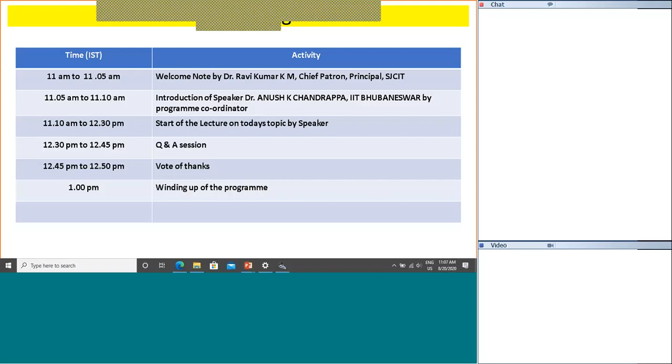Just check whether sir, mic is on or not. Yeah, your is fine. Dr. K.M. Ravi Kumar sir, can you speak, sir? Can you hear me? Your voice is not audible for us. One second, Som, I'm helping him, wait for a few minutes. Okay, no problem. Som, can you hear me? Yes sir, I can hear you. Som, he logged in with another number, you can check with DK. Oh okay DK, so you kindly provide the option for him. One second, DK, you are saying? Dr. K.M. Ravi Kumar, Dr. Ravi Kumar K.M. is another name, is it fine? Yeah, one more, I will leave this. Yes, so okay, yeah, so the issue is clear, you can speak. Okay.

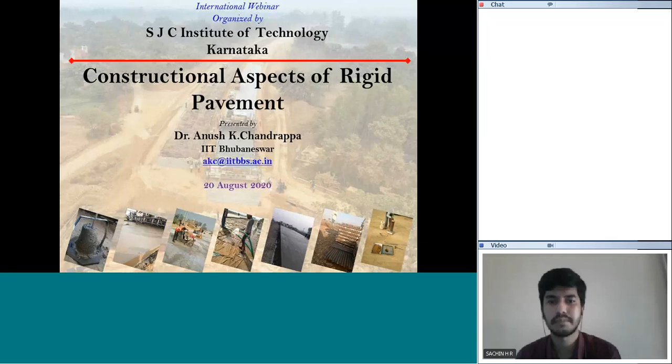Let's take a small introduction to pavements. We have two kinds basically: conventional and non-conventional. Conventional pavements include flexible pavements, which can be bituminous or unsurfaced granular pavements, and rigid pavements, which are mostly concrete pavements. Non-conventional pavements include semi-rigid pavements, porous pavements, and paver block pavements, and there can be different kinds within this category as well.

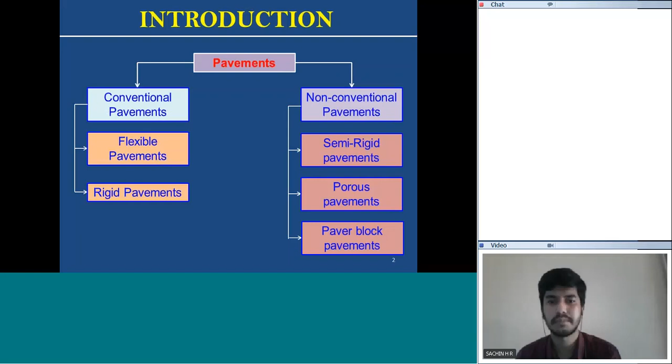In this presentation, we will limit our talk to rigid pavements. In rigid pavements, the load transfer happens through slab action, unlike flexible pavements where you should have a very good interlock between aggregates. Whatever load comes on the rigid pavement slab is transferred by slab action, meaning it should have a very high flexural strength. That's why we call it rigid.

It also possesses a high degree of stiffness. If you compare the stiffness of a bituminous layer to a PQC layer, that is pavement quality concrete layer, there's around 10 times difference approximately. Basically, rigid pavement means a concrete pavement, as I told you earlier.

This is a typical cross section of rigid pavements. We have pavement quality concrete, which is the concrete slab material, and dry lean concrete, the DLC, which forms a uniform foundation for the PQC layer. Then we have sub-base for drainage purposes, and subgrade as the founding material. Keep in mind that PQC and structural concrete used in other structures like beams and columns are quite different in terms of composition and workability. We will see this in further slides.

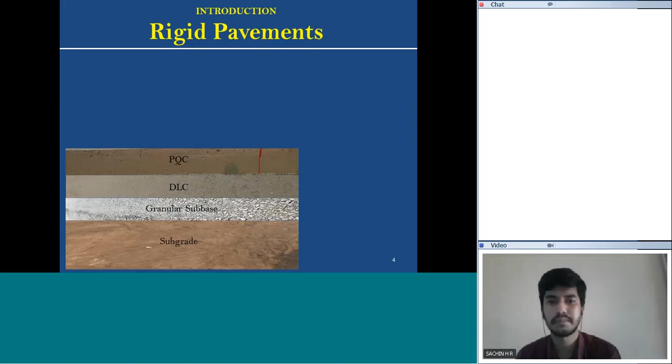So again, a typical rigid pavement cross section: PQC, DLC, granular sub-base, and subgrade. When a load comes on this pavement, the subgrade is subjected to very low load because the PQC slab takes the maximum amount of load. The lower layer just provides uniform support. In concrete or rigid pavements, the support should be uniform - even if weak, that's not an issue, but it should be uniform, meaning it should have the same modulus of subgrade reaction or CBR value throughout the stretch.

Now similarly, if the same load comes on a flexible pavement, let's see what happens. This is a bituminous pavement. We can see that at the subgrade, the load is spread over a very small area and the magnitude is very high. So the PQC results in a very low load at the subgrade layer, but a bituminous pavement may give higher load to the subgrade layer.

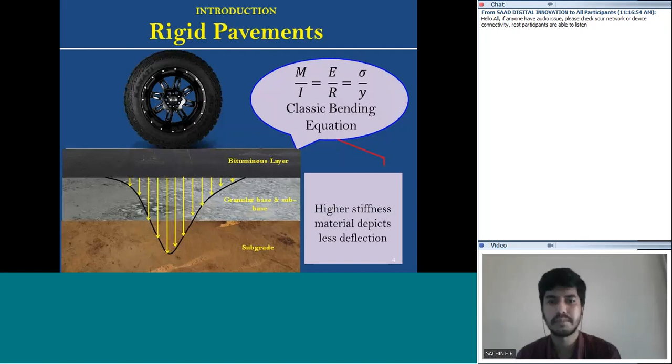In rigid pavements, we normally have three variants. One is JPCP, jointed plain cement concrete pavement, which is most widely used in India and designed as per IRC 58. Then we have JRCP, jointed reinforced concrete pavement. And then CRCP, continuously reinforced concrete pavement, designed as per IRC 118.

Mostly in India, we always go with JPCP because JRCP and CRCP may be costlier and also difficult to maintain if something goes wrong during construction or design. The difference between these three pavements is mainly joint and crack spacing, and the amount of reinforcement. JPCP is plain concrete with no reinforcement, but in JRCP and CRCP, we give some reinforcement mainly to hold the cracks tight without letting them open wide.

If you see this picture, this is JPCP. The joint spacing in JPCP, that is the transverse joint spacing, is around 4.5 to 5 meters. If it goes beyond 5 meters, it becomes quite difficult to control these cracks, as you can see in the profile, a crack along the depth.

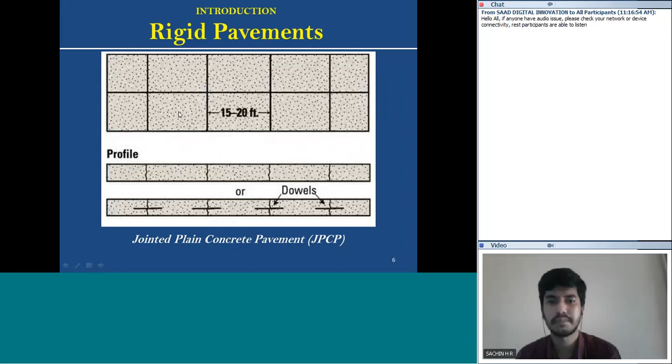So these cracks, if you go without reinforcement, for a longer or wider spacing between these transverse joints, a crack can come in between. So to contain this crack, hold it tight, and increase the joint spacing, we go for JRCP.

But keep in mind that whether it is JPCP, JRCP, or CRCP, for a given traffic, the thickness of the concrete slab may not change, because the reinforcement we give in JRCP and CRCP won't help structurally. It is just given to hold the cracks tight.

So if these cracks open wider, it will affect the riding quality, and water can easily ingress, damaging the reinforcement. So the mesh or reinforcement given in JRCP or CRCP is just to hold these cracks tight without opening wider.

Since CRCP does not have any joint other than construction joints, the riding quality in CRCP may be better compared to JRCP and JPCP.

But in JPCP, every 4.5 meters you will encounter one joint, and if the joint is not properly prepared, you may encounter a small bump or something like that.

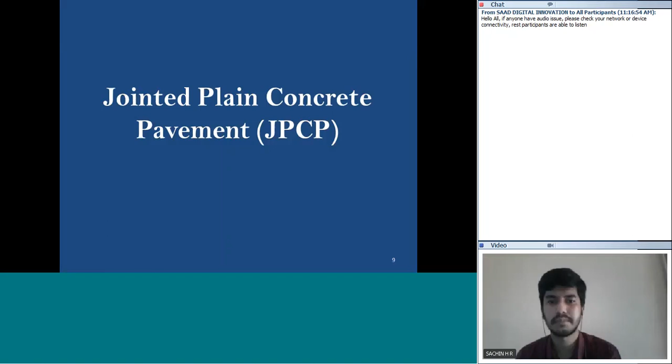But today's lecture we will confine to JPCP, because that is what we use widely in India, and most NH and SH are built using this JPCP technology. So in this lecture we will cover topics about JPCP, its stresses, technique of construction, how we lay JPCP, and design considerations.

Before I start, there is a very good saying, I don't know who said this, but it says: a wrongly designed concrete pavement, even though it will be a pavement, if rightly constructed will perform better than a rightly designed concrete pavement but wrongly constructed. That means if you have designed wrongly, maybe left out some traffic considerations, but if you have rightly built it with good quality control and practices, it can perform excellently. But if you have designed very well considering all parameters, but constructed wrong, with issues in quality, then the pavement may not serve its full design life.

Before we go further, the first concrete pavement was built in Inverness, Scotland, and then in India it was built in Madras. This information I got from the internet or Google.

Going for stresses, now we'll talk about concrete pavement. The concrete pavement will be subjected to two kinds of stresses or loads: one is load factors from commercial vehicles or traffic, and one is climate factors or environmental factors. These two factors will affect the concrete pavement at various stages of design life.

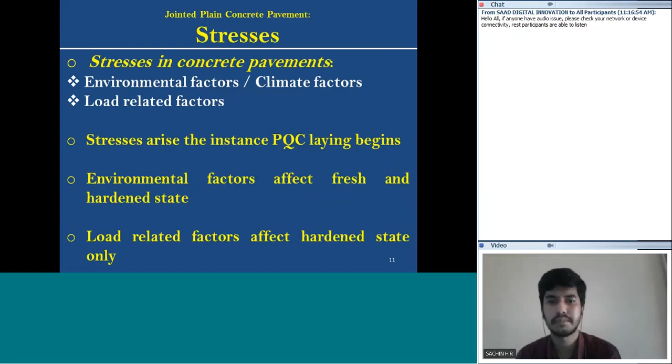So we'll see how they play a major role. Let's say when you start laying a concrete slab - this is basically a concrete slab - when you start laying, it's in a fresh state, fresh concrete laid.

So now what happens? This concrete will be subjected to sun rays and wind. These two factors start evaporating the water. In the top surface, the water will be evaporated, and due to this, there is a moisture gradient.

In the top, there is less amount of water. In the bottom, there is more amount of water. There is some gradient developing in the slab. Second thing, within the concrete there is a reaction happening which is exothermic. Exo means out, thermic means heat. So there is a heat release being released due to hydration of cement, which will increase the temperature of the whole concrete slab. Due to these interactions, there is a gradient, there is shrinkage, there is a reduction in the volume. It's trying to reduce its volume due to loss in water.

But parallelly, it is gaining also some strength, right? It will apply some restraint. So blue is restraint, it will apply some restraint. Due to interaction between these forces, it may lead to plastic shrinkage cracks, which are the first kind of cracks when we lay the concrete slab.

When you lay a fresh concrete slab, if you don't protect them from sun rays or wind, you will see very thin and widely spread plastic shrinkage cracks. Right now these are how they will look in the initial stage. So this is a hardened concrete slab. This kind of cracks are basically shrinkage cracks which have happened in the fresh stage itself. If it is not corrected in time, this is how the slabs will basically look.

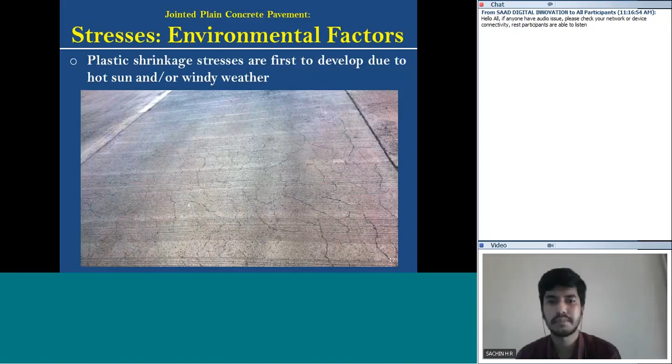Again, you can see they're very thin cracks. This is typical how the whole slab, if you don't protect from sun and wind, will look. Normally the plastic shrinkage cracks, if you want to identify in the field, you can identify just by looking at the pattern. Normally they are parallel to each other, and they're always perpendicular to wind direction.

So why perpendicular? What happens when the wind is going in this direction? Perpendicular to the road, shrinkage happens along this width. That's why the cracks will be parallel to each other and perpendicular to the wind direction. This is one way to identify what kind of cracks these can be, if it occurs in the fresh state itself.

Other thing, very important thing: after plastic shrinkage, a much more rigorous kind of stress is drying shrinkage crack. This drying shrinkage leads to excess contraction stresses. So what happens as the concrete starts getting harder and harder, it's gaining strength.

At the same time, as we lay a concrete slab, normally using slip form pavers, we lay at a rate of let's say around 300-350 meters per day. That will be the day's work, around 300 meters per day length covered. During that phase, the whole length-wise and also width-wise, it will try to contract because there is a loss of moisture, and hydration is happening, and heat wants to come out of the pavement.

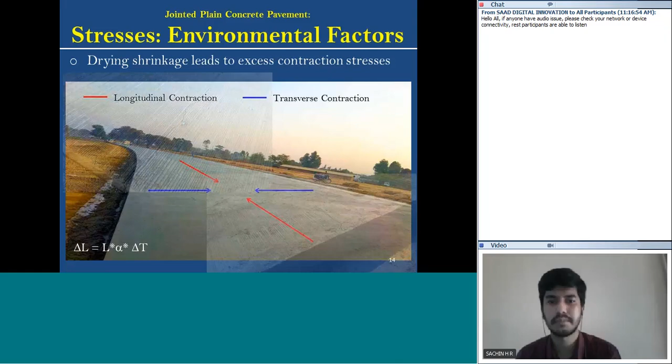More shrinkage can happen. To avoid that kind of shrinkage, we adopt some practices of construction which we will discuss. But this is how these contraction stresses will act in the fresh concrete when we lay a fresh concrete slab.

So due to these kind of contraction stresses, these kind of cracks will occur. This is basically a transverse crack which is due to longitudinal contraction. If you don't consider longitudinal contraction at a particular given time while laying concrete, these kind of full width and full depth cracks can occur in the concrete slab.

And these cracks, once they occur, are very difficult to maintain. First thing, because they are random - the shape is not straight, it is a random shape - and at this particular crack there may not be any load transfer devices other than interlock of aggregates. So we don't have any dowel bars or those kind of load transfer devices.

So over time, what happens? These joints will easily start spalling. When vehicles can start rolling on these kind of pavements, this will start spalling slowly and will become a wider gap, which will allow water and also other debris to enter, affecting the riding quality.

As I told you in this relation, delta T, the temperature differential, plays a very important role in PQC behavior, even in the hardened state and also in the fresh state. In the fresh state, it will cause contraction stresses. In the hardened state, it will cause curling stresses.

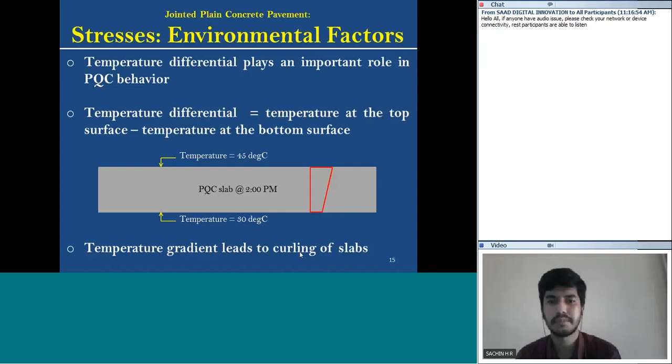At night time, the temperature at the bottom is high and the top is low. So it will curl upwards, like a bowl. You can see this phenomenon even when you keep some papad on a hot tawa, it will immediately take the shape of a bowl, because the top is cool and the bottom is in contact with the hot surface, so it starts curling.

Similarly in the daytime, it will curl in the other direction, curled downwards, so the center part will lift up while the edges remain in contact with the DLC. Here the top is at high temperature and the bottom is at low temperature.

This is the gradient stress trying to lift up the slab, and here is the self-weight restraint. One is trying to lift up the slab, and the self-weight restraint is trying to bring it back to the original position. Due to this, some issue arises. Similarly in the daytime, this gradient is trying to lift it from the center, but the self-weight holds it in the original position.

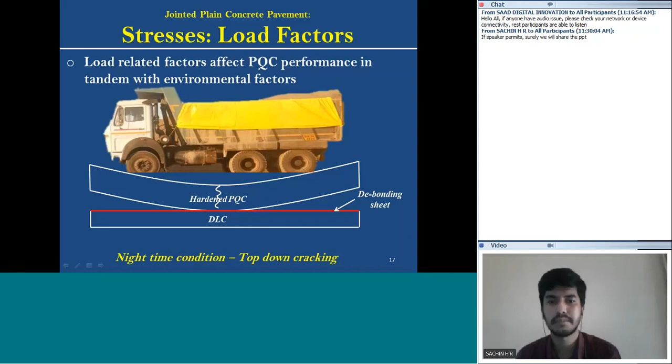On the other side, in the daytime, the curl is lifted downwards, and the center is upwards. Again, as the vehicle comes, the tension is maximum at this particular point, and it starts cracking from the bottom. So we call this bottom-up cracking. Again, this won't happen in one go, but due to repeated application of loads, which we call fatigue.

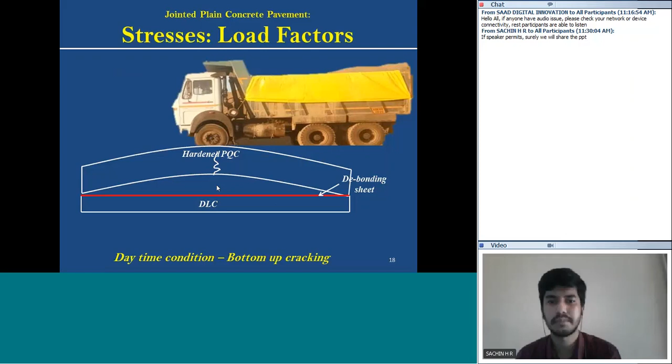So in the design of concrete pavement, we take into account the fatigue effect or fatigue phenomena. In fatigue, we apply repeated loads, and the load applied will not be equal to the ultimate strength of the material. It will be some percentage, let's say 30%, 50%, or 60% of the ultimate load, applied at some regular cycles, which can be 10,000 cycles or 1 lakh cycles, applied continuously.

As you apply more and more cycles, there will be crack initiation, because the material is losing its stiffness, and then the crack will start propagating. At some point, the material will completely break, which indicates the fatigue life of that particular material.

The same thing happens to the concrete pavement. Due to repeated application of loads, the crack will initiate and propagate, and finally at the end of design life, it will reach the top or bottom, depending on the type of crack it is undergoing.

So, as I told you, various stresses occur in PQC, which can be climate factors or load factors. These stresses are high enough to develop cracks in the slab even without loading. Let's say you don't apply any load in the concrete pavement at all. Even then, a crack will occur because of climate factors itself.

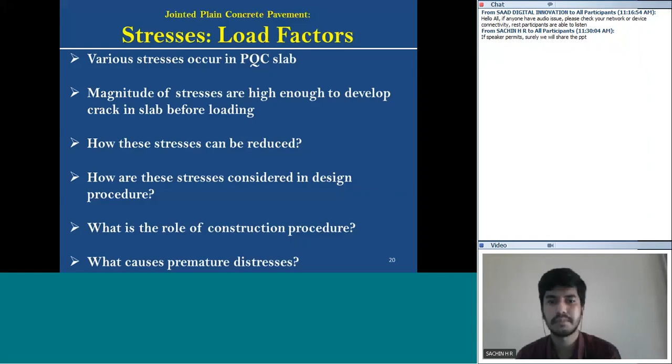So how to reduce these stresses? How can we control this kind of stress, and how are the stresses considered in the design procedure? While designing, how do we account for them? And what role does the construction procedure play? When we construct the concrete pavement, does it play any role in controlling these stresses? Then, what causes premature distress? Sometimes, if we adopt a wrong construction practice, there can be development of premature distresses. We'll look at all these things in a step-by-step manner.

First, let's have a look at H.R.S. Westergaard. He's one of the fathers of pavement mechanics. Whatever design we do for rigid pavements like concrete slabs, all the equations we use were basically developed by H.R.S. Westergaard.

Going for JPCP construction, the construction of concrete pavement involves various steps. First, we lay and compact the subgrade, normally estimated at 500 mm thickness, compacted layer by layer, like 200, 150 and 150, to achieve proper density, not in a single 500 mm layer. Then we lay and compact the granular sub-base layer, which acts as a drainage layer. Then we lay and compact the DLC layer and the PQC layer, followed by finishing, texturing, tining and joint construction. All these steps finally give the product of JPCP.

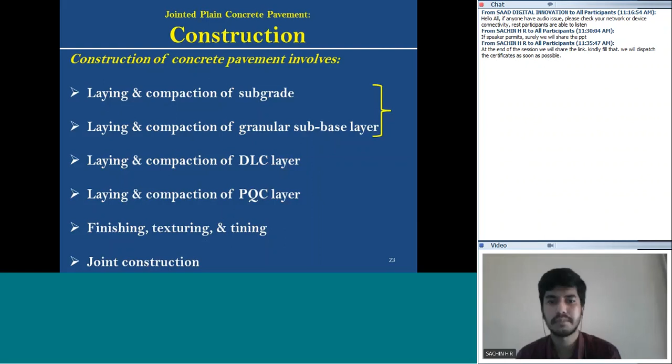When we talk about subgrade and GSB, these are common for flexible or rigid pavements, and there won't be much change in the base layer. So we start with the DLC layer. DLC is basically a harsh concrete, a material with around 150 to 160 kg per m³ of cement, with a particular gradation, laid in the same manner as flexible pavement. So whatever equipment or practices you adopt for flexible pavement can be adopted for DLC also.

In DLC, the most important thing is mix design. DLC should be designed; you cannot just mix cement and aggregate and compact it. It should be designed for particular requirements, and for that we follow IRC SP 49. The thickness of DLC is normally fixed as per IRC standards: for SH and NH, we assume 150 mm, and for other roads, 100 mm, which is used for normal construction.

Now, the main function of DLC is to provide uniform support for the concrete slab. As I told you, even if the base is weak, that's not the issue, but it should be uniform. So if there is non-uniformity in the GSB or subgrade layer, this is taken care of by the DLC, which provides uniform support for the PQC slab to rest on.

Second, the width of the DLC layer is always more than the PQC layer. This serves two purposes. One is in mechanized construction: when you go for slip form paving, this extra 0.75 meter acts as a platform for the slip form paver track to move, since the track requires a very hard and plain surface. We use this extended DLC width as that platform. Second, studies have shown that the extended DLC base can also have some impact on reducing PQC stress.

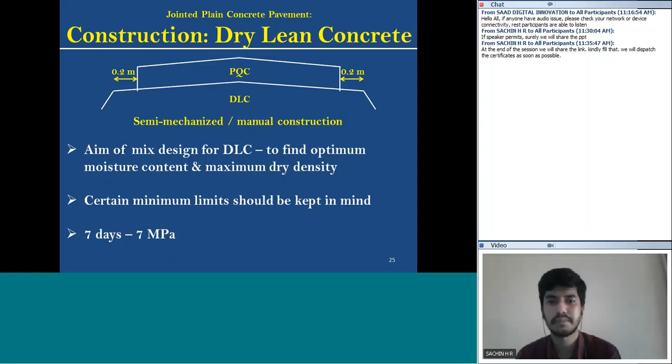Now we'll see how this design is made basically. Specification of cement content, aggregate gradation, and aggregate to cement ratio - these three should be first finalized. What cement content do you want to adopt? Minimum cement content as per IRC is 140 kg per cubic meter, and as per MORTH it is 150 kg per cubic meter.

But yes, you can go still higher if the strength requirements demand. Aggregate gradation is a particular gradation given in a particular code, and it can also depend on the contract agreement. Then we have aggregate cement ratio - what is the ratio of cement to aggregate?

Once you do this, you prepare mixes at various water content, then develop a density moisture relation, and identify the optimum moisture content and maximum dry density. Whatever density and OMC is finalized, at that particular density you will again compact a cube and find the compressive strength. If you achieve 7 MPa at 7 days, then the design is finalized. If not, you may have to change the cement content or reduce the aggregate to cement ratio and rework the whole design procedure.

Now, selection of material composition. Normally we use OPC, which as per IRC is 140 kg per cubic meter, and as per MORTH it is 150 kg per cubic meter. The aggregate cement ratio given by IRC is 14:1, and the MORTH gives 15:1. You can also go with fly ash and other SCMs added in DLC. But whenever you add fly ash or other SCMs, the aggregate to cement ratio must be reduced to 12:1, as recommended by IRC, because the strength gain in those materials may be low.

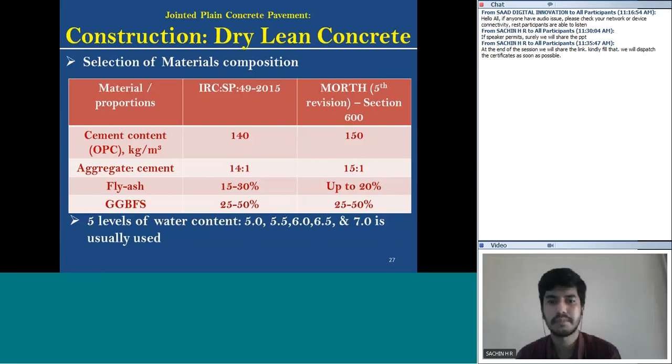When developing a density moisture relation, we go with starting 5 to 7% of moisture content - we start with 5 and end with 7. In this particular range, we will be able to obtain the OMC and MDD. We will prepare a cube at different moisture contents, as I told you.

In compaction, we use a vibratory hammer, not a Proctor hammer. We use a vibratory hammer which applies a force of 300 to 400 Newton using a particular plate area for 1 minute per layer. We compact it normally in 3 layers, vibrating each layer for 60 seconds, and finally measure.

So basically we measure density corresponding to water content, then identify OMC and maximum dry density, whatever water content we achieve. This is how we will finally get one density moisture relation. Once we find this MDD, at OMC and MDD, you will again cast cubes at whatever cement content you have used and find the strength at 7 days, which should be at least 7 MPa.

As told, we require 7 days 7 MPa as per IRC SP 49, and as per MORTH it is 10 MPa. The reason MORTH has a higher 10 MPa is basically that the aggregate cement ratio is quite high in MORTH. So there is some change in the strength requirements. If you want higher strength, you can go with higher cement content. But keep in mind, giving higher cement content may also cause issues with cracks in the fresh state.

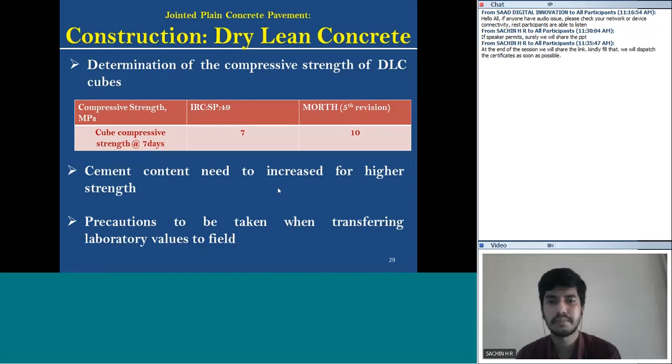You will basically require a closed environment, so there won't be any exposure to the environment - no hot sun, no wind and all. But in the field, you're transporting the mix from the plant to the site, and there will be some losses due to evaporation, where the moisture content you added may change.

So at that point, you may have to cover the DLC to prevent the loss in moisture. You can add an additional 1 to 2% extra moisture for compensating these kinds of losses.

So that you ensure that when it goes to the site or the particular dumping site, the OMC will be achieved there. The construction we do is same as flexible pavement practices - we use the same kind of paver used in flexible pavement, which has a system of auger, a vibrating screed and a hopper. Everything we use, this same equipment, for this DLC material.

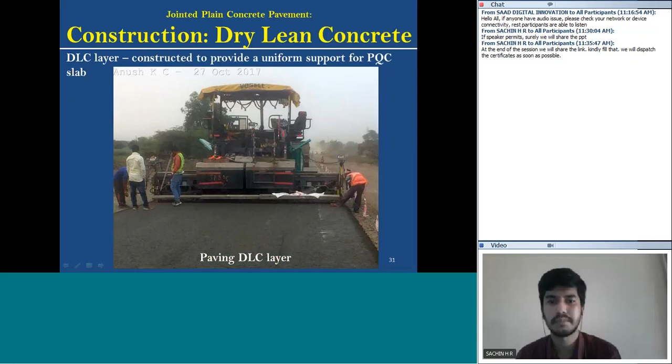Once we lay it, we use a particular screed which gives initial compaction, just to make it a flat surface, and then we start with rolling behind. The rolling passes, the number of passes, will be decided based on the trial stretch we conduct before laying the DLC in the field.

Second thing, the joint construction - so basically we are conducting a joint. Unlike hot mix asphalt, where you can push the material and there will be overlap, here mostly there won't be any overlap because it's a hardened material. So you will basically cut a vertical joint, apply some cement slurry, and then place a new or fresh DLC layer.

Once you finish the paving operation, compacting operation, and rolling operation, you will immediately apply curing compound. The curing compound is essential to avoid loss of moisture. What happens is, if you don't apply it and there's hot sun and a lot of wind blowing during construction, the top surface may become too dry and friable - that means it can become like powdery. So to avoid those situations, it's better to apply curing compound immediately once you lay the DLC.

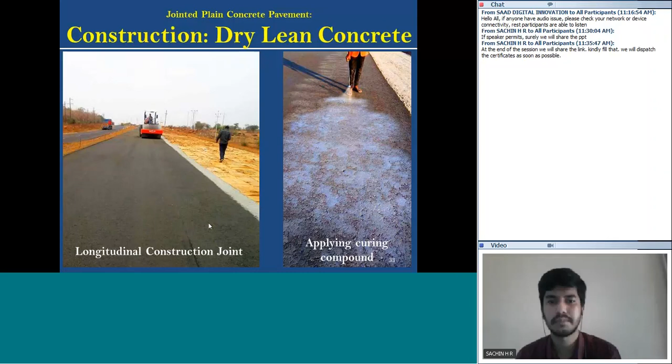This curing compound can be wax based or resin based. It should hold the water for around 4 to 5 hours, and then again you will have to use jute bag curing to avoid these losses. This is curing done using emulsion - so even emulsion can also be used as a curing material in the DLC layer.

Once you stop the previous construction, you will start the next stage by making a joint construction so that you may bond the next layer and the new layer. You can add some cement slurry at the joint so that proper bonding can be expected.

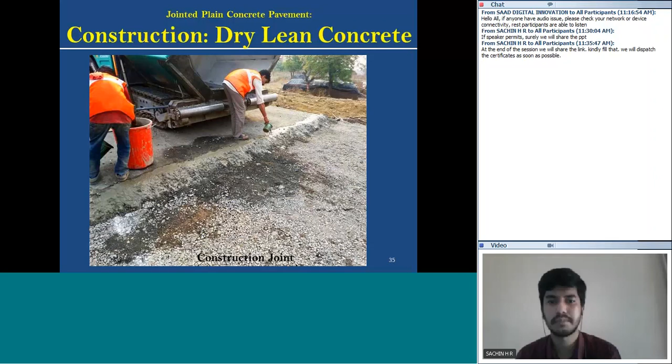Finally, once you lay it, you determine the OMC and density achieved in the site. For this, what is the reference density now - is it the laboratory values or the trial stretch values? Normally, we don't take laboratory values for DLC because in the laboratory, since we're doing it in a very closed environment, the density may be quite high.

In that case, the same lab density we achieve will be transferred to the field to come up with a trial stretch. Before going for large scale construction, you will do around a 60-meter trial stretch somewhere near the site, and then you will achieve a particular density - like it can be 98% or 99% of lab density. That will be the reference density for your further field-scale large scale construction.

That will be your maximum density, or density of 100%. So in the field, you need to achieve relative density for the field trial stretch, not the lab density. So, as I told you, the DLC, while laying, can undergo excessive drying, and also depends on the distance from the camp site to the site of construction.

If it is too far, what happens? There will be loss of moisture in the DLC material. Even if you cover it with a tarpaulin, we may expect some loss of moisture here and there. So to avoid that, there are some guidelines given.

If it's 90 minutes, it takes 90 minutes for finishing the whole process, then the air temperature should be 25 to 30 degrees. You have to finish in this time. You can have 120 minutes for the finishing process when the air temperature is less than 25 degrees.

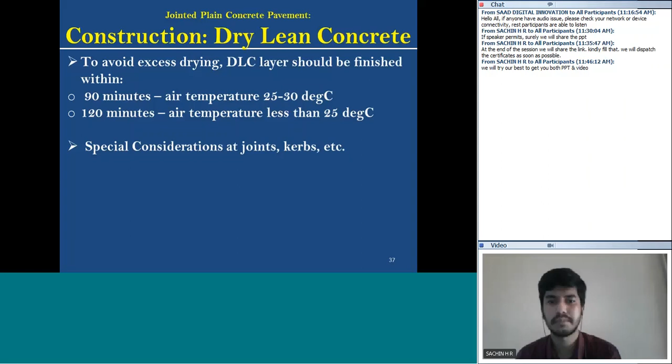This way you can adopt some quality control to avoid any loss in DLC quality. There will be special considerations at joints and kerbs. Near the kerb, a roller may not be able to move very close, so you may use a plate vibrator or a baby roller. Small rollers can be used to compact those edges where the DLC cannot exactly reach near the kerb. So you can easily use a plate compactor or a baby roller, and similarly at the joints also.

So that was about DLC. Now we'll slowly go towards the PQC. PQC is the only designed element in concrete pavement. If you see the concrete pavement, whether it can be any other, let's say, higher pavement, mostly we design only the slab thickness. We won't design DLC thickness - it is fixed as per the IRC, and the GSB thickness is also fixed as per the IRC. So we design mainly the PQC, and this is logical and rational because the maximum load-taking element is basically the rigid concrete pavement, and that has to be designed, unlike other layers where the load transfer to them is very low.

While laying PQC, the most important thing is harmony in the construction. All the steps should be properly interlinked to achieve a very good concrete slab at the end of the day. The steps involve preparation of mix at a plant as per the design of mix done in the laboratory. Then, parallelly, you prepare the subsurface - this means the PQC will be laid on the DLC, so the DLC may have some dry or friable particles which have to be removed. Then you transport the mix, you pave the PQC, do surface finishing, prepare the joints, cure it, fill the sealant at the joints, and then open it to traffic. This is the whole process of PQC construction which should be properly managed.

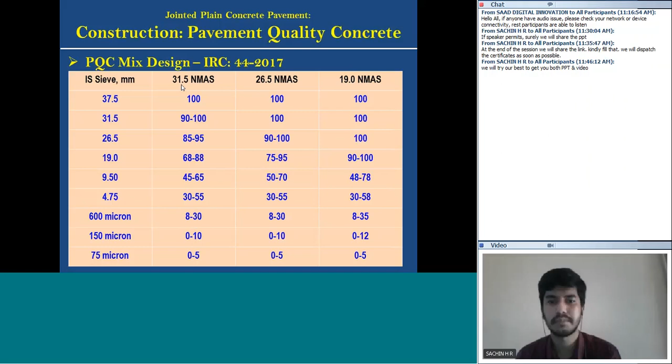So mostly 31.5 is preferred considering the performance and also the cement. If cement content is too high, it's bad; if too low, it's also bad. This particular gradation gives a very balanced cement content which can be easily maintained or controlled at the site under field conditions.

You can also use admixtures - fly ash, silica fume, metakaolin and GGBS. These materials can be added as a replacement for cement so we can achieve some sustainability, and they may also improve the durability of the concrete over the long term. By adding fly ash, you will not obtain a very high initial strength, but in terms of durability and workability, it can be better.

Going for the PQC mix design, I won't go into more detail. Normally we talk about concrete design, we target some flexural strength - to achieve a characteristic flexural strength of 4.5. That is what we use as the 28-day strength, the characteristic flexural strength.

But while designing, we target a higher strength assuming some standard deviation - it will be characteristic flexural strength plus 1.65 standard deviation. This value is what we normally use for M40 concrete. If you use this value, it will be around 5.16 MPa, what we need to achieve as target strength.

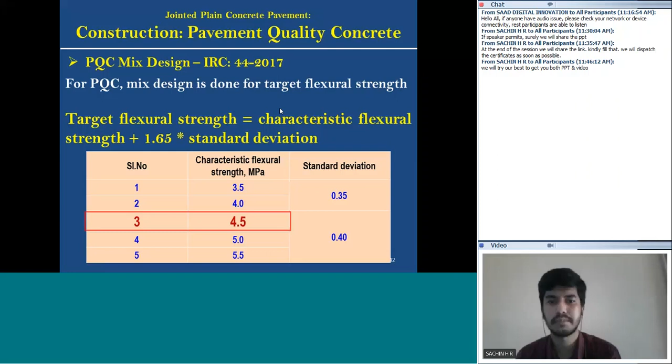Going for the components of the PQC mixing plant - the mixing plant is where we produce the PQC. The capacity of a single plant can be 120 m3 per hour, or even higher depending on the agreement of contract or the contractor's capacity. It can even be 240 m3 per hour.

Now the 120 m3 per hour plant will be giving around 80 to 90 m3 per hour, considering the efficiency of the single plant. It won't always produce 120 m3 - obviously there is some loss of efficiency. It will be 80 to 90 m3 per hour.

So then we have a cement silo which holds the cement, then a pug mill to mix the concrete, then a chilling plant. Then we have dumpers, then aggregate stockpiles. Dumper capacity, or what we call tippers, normally the capacity is around 8 to 9 m3 they can carry. So for 1 hour, around 9 to 10 dumpers may be required to finish one batch of a single plant.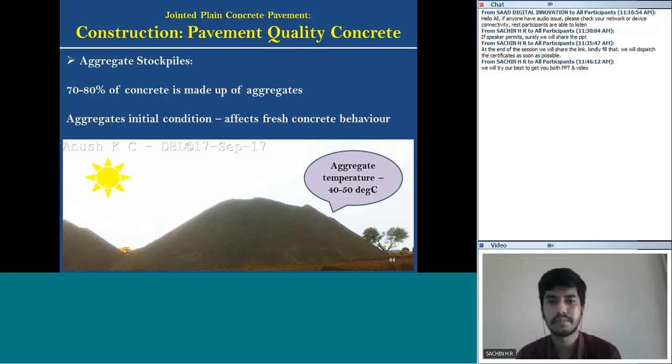Now when it is very hot, let's say midday or normal days, the aggregate temperature will be around 40 to 50 degrees. This high temperature can certainly affect the fresh behavior of concrete. What happens when you add this 40, let's say 50-degree aggregate temperature in the mixing plant - at the same time, normally the cement you get on site will be in the form of a bulker. You won't use cement bags, but use directly from the plant. You bring the big bulker.

The cement will be loaded in the bulker, and it also will be very hot, like 50 to 60 degrees temperature, because it directly came from the clinkers. So when this 50-degree cement and 50-degree aggregate are combined to produce concrete, the concrete will be at much higher temperature because it releases heat while hydrating. It can be around 60 degrees. At this high temperature, the concrete can easily undergo shrinkage cracks - the high temperature of materials means the concrete will be having high temperature.

High temperature of concrete leads to plastic shrinkage cracks and harshness, so it's very difficult to control this kind of concrete. High air temperature plus high wind velocity and low relative humidity are very favorable for shrinkage cracks—they're like close friends causing it. So the worst case is hot concrete, hot air temperature, high wind velocity, and low relative humidity. The concrete will easily fail and you cannot control it in the field. Even if you pave, it will immediately show a crack as the paver goes forward.

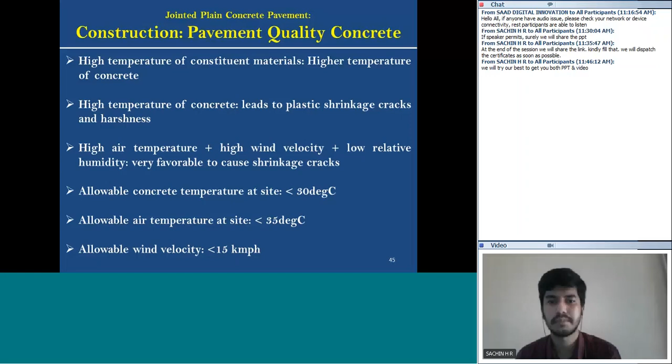So there are some guidelines from experience. Normally the concrete temperature should be less than 30 degrees when you bring it to the site and pave. Second, while paving, the temperature of air should be 35 degrees or less—less is always better—and the wind velocity must be less than 15 kmph. These three things should be correctly ensured at the site while paving the concrete pavement. If any one of these is exceeding, there is an issue with the quality of concrete, which will be difficult to manage once it hardens.

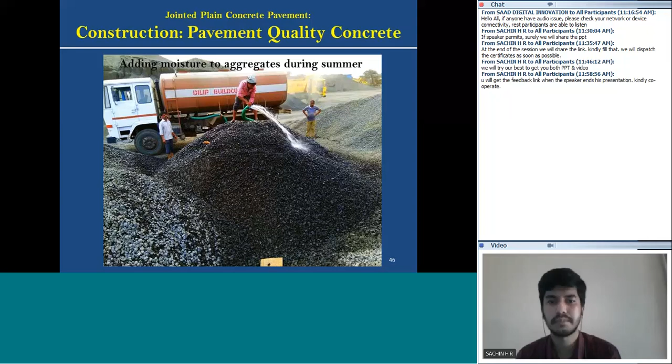So how do we ensure PQC temperature is less than 30 degrees when cement and aggregate are hot? Normally what we do is add moisture to keep the aggregates cool, but we must consider this moisture while doing the design, since whatever we add will keep the aggregate wet or cool, which can lead to excess moisture in the concrete. These things should be taken into consideration while producing the mix at the site.

Second, the plant has a chilling plant which produces a lot of ice. These ice chunks can be directly used in the water to produce the concrete. This way we can bring the temperature of concrete from 60 to 30 degrees or less.

Once we do all these operations and the mix is ready, the next step is preparation of the subsurface. As I told you, the subsurface is basically DLC, which will be having some foreign particles like waste aggregates, dust, and construction debris. All these things should be properly cleaned and made very clean.

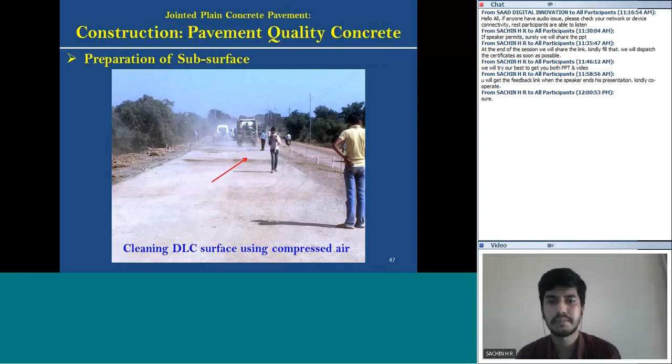For this we can use compressed air to blow away all the waste material, and then also pour some water to make it damp. Once you prepare the subsurface and make it damp, you will place a debonding sheet on the DLC. This debonding sheet, as I told you, prevents bonding between PQC and DLC, so we clean the DLC surface to place it properly. If you don't clean the DLC, even placing the debonding sheet can puncture it. So to avoid this, properly clean the DLC and make it damp before placing the concrete.

Once you place the debonding sheet, parallelly we fix the string line, as per the required level of PQC and thickness of PQC, whatever is required. It's a very important aspect—the string line acts as a guide for the paver.

The spacing between these pegs or hinges, whatever you use, will be around 10 to 5 meters. Lower spacing is always better, so it will have less suspension of the string line, and the string line should be checked regularly for proper tension while laying the PQC.

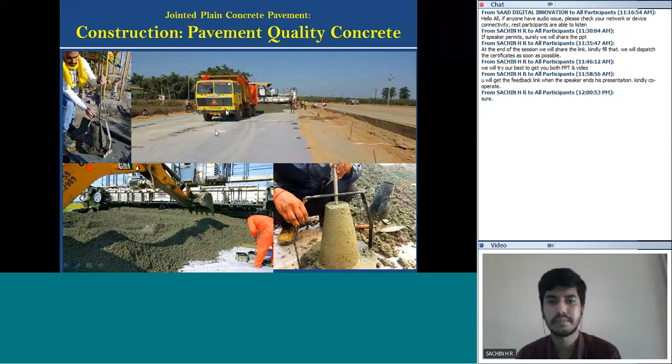Due to continuous movement, the JCB will move on the same sheet. Due to continuous acceleration, deceleration, and all, the debonding sheet can undergo puncture or get completely ruptured. This will violate our assumption of it being a debonding sheet, and the PQC and DLC may get bonded. When these two layers get bonded, the stress profile will be very different compared to unbonded layers.

To avoid this, normally we give this kind of tracks where the dumpers and JCB will use this particular track to spread the mix in front of the slip-form paver. Even if you don't have a particular tarpaulin track, you can use good tracks also for this purpose. And then going for the components of the PQC train.

Let's say everything is ready, concrete is ready in front of the slip-form paver. So we have the PQC paving train. Why do we call it a paving train? Because there are three components: the slip-form paver, the mason trolley, and the texturing curing machine.

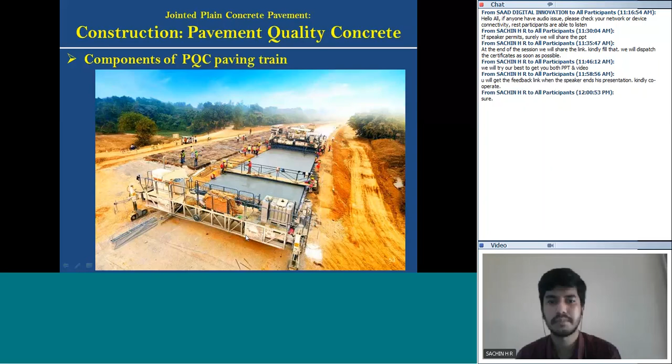They go together in particular harmony, and each unit has some particular function to play. Let's see this with the Mumbai-Pune expressway.

This expressway was the first slip-form paver executed pavement in India. Once I was talking to Dr. Engineer R.K. Jain, who is the engineer from Sonipat, Haryana PWD, he told me that this particular pavement was built lane-wise.

You see, there are around 3 lanes. It was built first lane, then the second, then third. So they built it lane-wise. But nowadays, all pavers build all 3 lanes at a time due to technology advancement.

Then components of the slip-form paver. Now the slip-form paver has a few important components: one is the spreading plow, then we have vibrators, then dowel bar inserters, tie bar inserters, oscillating beam, and super smoother. Each component is very important in the proper functioning of the slip-form paver and has individual functions to play.

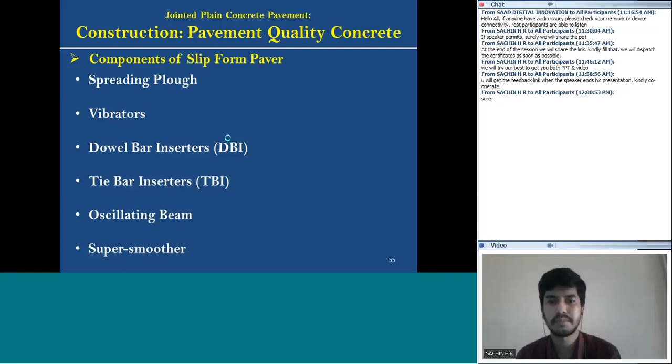With the spreading plow, once you spread the mix or heap and break it in front of the slip-form paver, this spreading plow will spread the mix to an even surface in front of the paver. This spreading plow basically moves to and fro, and some pavers may also have an auger system, similar to the auger used in flexible pavement.

Same auger may also be used in this kind of slip-form paving, but mostly a spreading plough is preferred. This will move to and fro, spreading the concrete mix evenly in front of the paver. Then we have an important component: vibrators.

Once the spreading plough spreads the mix in front of the slip-form paver, the paver slowly moves forward at a 0.5 to 1 meter per minute speed, dragging the concrete inside the slip-form paver.

At the same time, there are a series of vibrators. If you see the wires and hydraulic systems, these vibrators vibrate the concrete continuously and give it the required shape. Let me show this particular photo here.

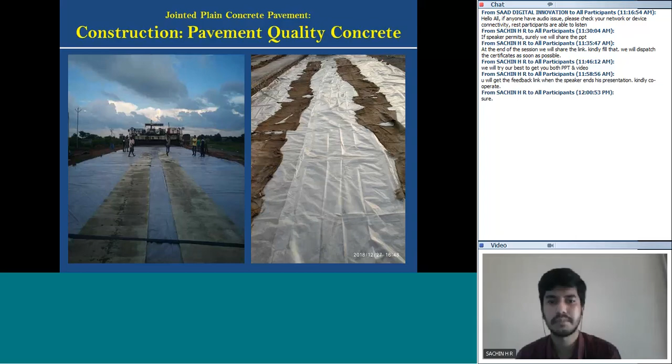This is the particular plate, the slip-form paver plate, which gives this particular shape to the concrete slab. These plates.

Now these are the vibrators we see here. These vibrators vibrate at an amplitude of around 8,000 to 10,000 impulses per minute. It's a very huge vibration because the mass of concrete is too high.

But if the vibration is too high, it's a problem, and if too low, it's also a problem. If you go too high, beyond a particular maximum limit, due to over vibration the whole cement paste moves upwards and all the aggregates go downwards. There will be segregation inside the concrete, but you cannot see it from the top.

Over time, this segregation shows as parallel lines. Behind the paver, as it starts slowly hardening, we can see parallel lines wherever the vibrators were placed. These parallel lines are called vibratory trails. This is very dangerous or risky from a functioning and structural performance point of view. These trails have very high cement content at the top, like mortar, while at the bottom all the aggregates have settled.

Due to this, over time these trails form longitudinal cracks, continuous cracks that damage the concrete pavement. Similarly, if vibration is too low, the concrete will not get proper vibration, which will not give proper strength.

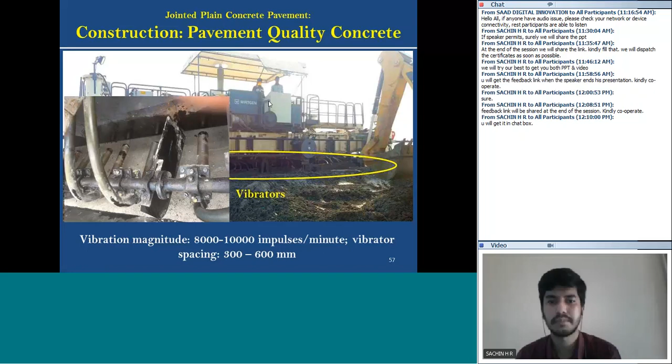Next is dowel bar inserters. As we know, in PQC concrete pavements we give dowel bars as load transfer devices. These dowel bars are inserted, not placed before the concrete. Sometimes they are placed manually in manual construction, but in slip-form paving they are pushed inside the fresh concrete. You see this particular assembly called the dowel bar inserter.

Each slot you see here has a dowel bar, and this port pushes the dowel bar inside the concrete. These are the marks made by the pushing dowel bar, and this mark is covered or closed by the concrete through the oscillating beam. This way, the dowel bar inserter inserts dowel bars at the required spacing and required depth.

It also vibrates while placing the dowel bar because it has to loosen the concrete, since it must push the dowel bar to at least d by 2, that is thickness by 2 depth. So it should vibrate and then push the dowel bar. There will be two ports on either side, and then we have the dowel bar itself.

Dowel bars are a very important element of PQC because they act as load transfer devices. Sometimes you can see two kinds of dowel bars I'm showing here. One has a surface that is very blunt with some projection. The other is very flat, plain, and clean. These blunt kind of dowel bars create problems for inserting and may affect the progress of SFP, and it is also very difficult, hampering proper function.

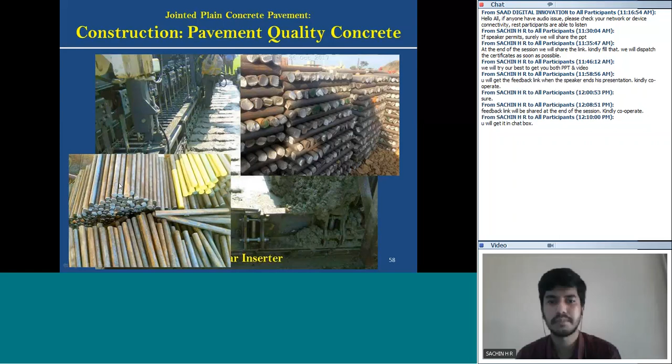So now we have a close view of this particular dowel bar inserter. The dowel bars are placed here, and you can see the dowel bar has a blue color plastic covering given to it. The plastic covers are also taped with cellophane tape, or normal cello tape, to prevent the cement paste from going inside the gap between the dowel bar and this plastic sheet. So now this will be inserted.

Now when we insert, this is how the construction will look. Here you can see this is basically a plastic sheet under the dowel bar. This is the cutting we will make after hardening, and this is the typical view of how the dowel bar looks, placed at a depth where d by 2 is the pitch normally.

One of the very important things in dowel bar placing is misalignment. Dowel bar misalignment is a very risky phenomena because once you place dowel bars, you cannot see how they are placed, right? They are inside the concrete, which is opaque, so you cannot see if they are parallel. The preferred condition is parallel, to each other and parallel to traffic direction. There should not be any skewing or translation.

When you place a dowel bar, we assume it is placed correctly, but how is it actually placed? Is there some skew, some movement? All those things should be taken care of. So we see here the typical misalignments that can happen while placing: this is horizontal translation, this is longitudinal translation, and this is vertical.

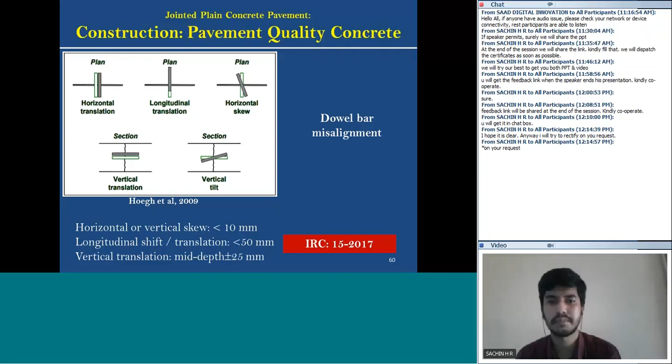Now we'll see a simple case study we had done. We had one crack, right? While laying the concrete pavement, we saw some cracks at joints, at regular intervals, wherever there was a dowel bar. So we anticipated some issue with the dowel bar placement, so we could correct it in the next set of construction. We saw the crack, and since we knew it might be related to the dowel bar, we took two cores. We know the length of the dowel bar, so we know its position. We took two cores opposite to each other, one here and the other here.

So the length of the dowel bar is covered in the particular core, and when we took the core, you can see a crack was there. It's a full depth crack at this particular point, and the crack was not further extended. Only where the dowel bar was there, at this point the crack was there. So then we took a core and found some points.

One thing you can see here, the dowel bar has some vertical translation, right? This slab thickness was around 280 mm. It was not at 140 mm, but it was quite down.

There's a vertical shift. Second thing, when we took two sides, this one side and the other side, there is some skew also. Both are same thickness, both have the same dowel bar. Now these are the lower level, these are higher level, meaning there is some skew. Skew has happened between these two, vertical skew has happened. So you see here, this is the bottom surface. It's not pointing at the other end.

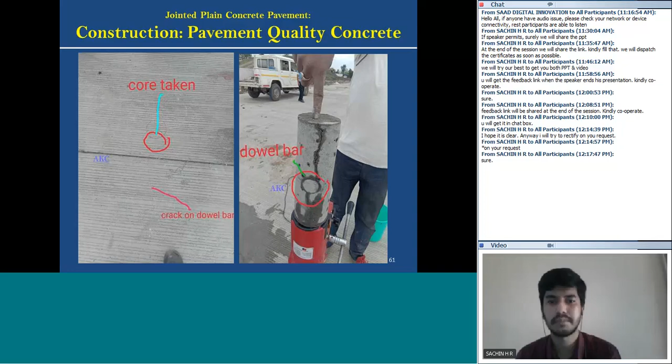So then we have tie bar inserters. Similarly, dowel bar inserters or tie bars hold the two slabs in position so they won't move away from each other once you give a cut. Tie bars are basically a TMT bar, whereas dowel bars are smooth bars - the surface is smooth, with no ribs or projections, so that it stays free and not bonded with the concrete. That means at the dowel joint, the concrete can move easily.

It expands and contracts. But the tie bar is a TMT bar, a ribbed bar, which will be bonded to the concrete to hold the two slabs together. So again, we have this particular oscillating beam as I told you. Whatever marks are made by tie bar inserters and dowel bar inserters will be covered by this oscillating beam. This oscillating beam will move to and fro like this and collect the thin paste, and slowly whatever is collected will start covering this particular spot.

If you don't cover this spot properly, this will be reflected on the surface very soon. I'll show some other instances where you can see this kind of tie bar marks, dowel bar marks, which will later convert to a pothole, affecting the riding quality. So it's very important that the marks are not seen once the concrete is filled. This should basically be a very cement-based mix, so that it fills all the voids made by the tie bar inserters or dowel bar inserters.

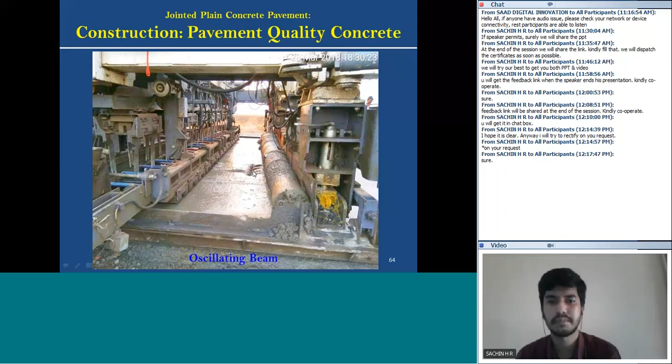Finally, we have this super smoother. It will act like a finishing tool for the PQC, using the cement paste we had. It will make a very finished surface, covering all the irregularities.

So all will be covered by this super smoother, right? So once we do super smoothing, we see it will be very smooth surface. All the cement paste is on top surface, so this will affect the riding or skid resistance.

So to improve the skid riding quality or skid resistance on the surface, first thing what we do, we go for texturing. The texturing is done using a mason trolley.

Mason trolley is one of the components of PQC train, where this will be a platform for the mason to stand, because this is wet concrete and one cannot walk on it. If there is some irregularity to be corrected, one cannot walk and correct it, it will damage the other concrete. So this mason trolley provides a platform where the mason can stand on it and correct wherever there is irregularity.

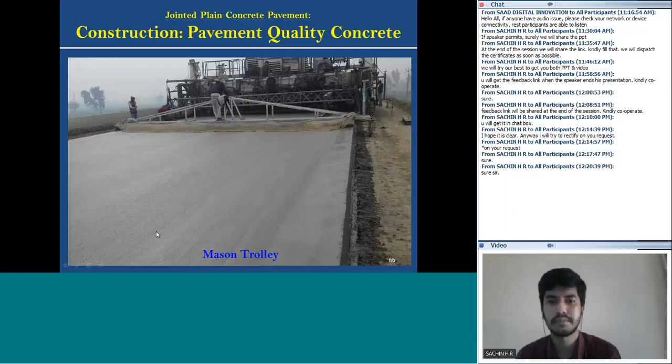If we have some wheel, it can be pushed manually, or some motorized mason trolleys can also be used. Also, on the mason trolley we give a jute bag. The jute bag will take excess paste from the surface and give this particular rough texture, meaning it will expose some sand and cement mortar on the surface, so that we get some texture or rough surface. This is further improved by the texturing curing machine.

This is called the texturing curing machine, which is behind the mason trolley. This texturing curing machine basically has two functions: one is curing, other is texturing, or we call it tining. These are typical TCM. So surface finishing of PQC has two steps: texturing and tining.

This is what we call texturing, and this is called tining. The TCM or texturing curing machine has this brush, which has wires that just move to and fro on the concrete and create this tining.

Now this tining, once it gets hardened, will remain permanently, and this tining should not be done immediately after laying PQC. At least a gap of 30 minutes should be given, because if tined immediately after laying PQC, the marks can get closed since the paste has a tendency to flow. So give a gap of around 30 minutes, then we can start tining operations.

So this is the tining, and then the tining pattern also matters a lot. Normally this is the tining pattern, typical pattern given in IRC 15 if you refer. But in this pattern, the spacing is irregular — this spacing is less and this spacing is more.

They are not evenly spaced. The tine brushes are not evenly spaced; they are spaced at some random pattern. This is to avoid the vehicle wheels undergoing uniform contact.

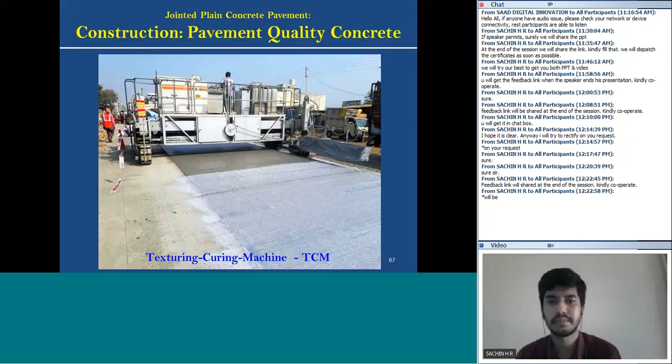Once you complete all this operation and cure the concrete, you allow it for 4 to 5 hours, so that it gains some strength in that period of time. As this happens, it will prepare for the joint construction.

Joints play a very vital role in the PQC. It's an important aspect where one should give very vital importance. Joints in PQC are basically induced cracks. As I told you in the initial slides, drying shrinkage cracks will cause full width, full depth transverse cracks, but those are uncontrolled cracks. Now in JPCP we give a joint, and these joints act as induced cracks and also as a controlled crack, unlike in plain cement concrete.

We have three kinds of joints in PQC: contraction joint, construction joint, and expansion joint. Normally expansion joints are not given in concrete pavements. Mostly we give them only in places where a concrete pavement abuts a bridge, where the PQC road and the bridge meet at some point. Other than this, we never give an expansion joint because they affect riding quality very much.

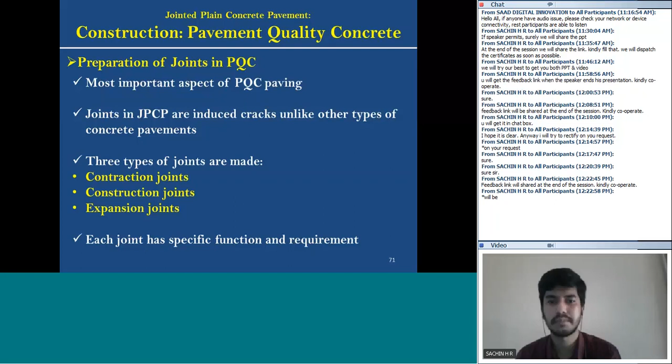Normally we give two joints: contraction joint and construction joint. Both can be either transverse or longitudinal. Each joint has some specific function and requirement. They play a very important role with some specific function which they satisfy, and both joints have some requirements to be satisfied. Now let's go for the contraction joint.

The contraction joint can be given in both directions, transverse and longitudinal. Its purpose is to allow free shrinkage of PQC. As I told you, drying shrinkage basically causes contraction stresses. To avoid this contraction building up more and more stress in the PQC, before drying shrinkage can take over the concrete strength, we give this kind of contraction joint so that whatever cracks happen will occur at the place where you give the joint. This means we are creating a weakened plane in the concrete slab where this drying shrinkage can be relieved, so we try to give this controlled crack.

The requirement is: at the transverse contraction joint we give dowel bars, and at the longitudinal contraction joint we give tie bars. Joints are prepared by cutting grooves at predefined positions. While laying the PQC, we mark positions on the shoulder side, on the DLC side, where the joint should be given, because that's where you insert the dowel bars. You need to mark those positions, and after 4 to 5 hours of laying the PQC, at those points we start cutting the groove.

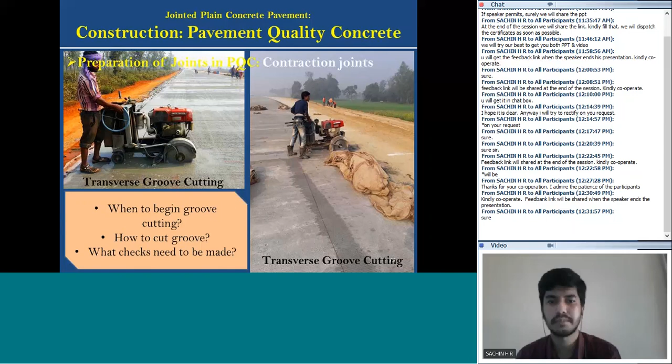So what you can do is test the cube strength at different time intervals, and see at what time interval you get 2 to 5 MPa strength - that is the time interval where you can normally start the groove cutting. But the best way to identify is that the slab should be able to take the weight of the machine. As I told you, in summer normally 4 to 6 hours after laying you will cut the groove, and in winter between 6 and 8 hours after laying you will cut the groove.

Now this is what happens if you cut late or cut early. If you cut early, the concrete is still hardening, it's not too hard yet. When you insert the blade - let's say concrete is able to take the machine weight and start cutting - the cutting blade will start picking the aggregates in the concrete. When it picks, it also brings some chunk of concrete upwards. So you can see these kind of large marks near the joint, and these marks can slowly develop into spalling over time when we open for traffic. This way the joint quality will be damaged, so you should identify the proper time for cutting.

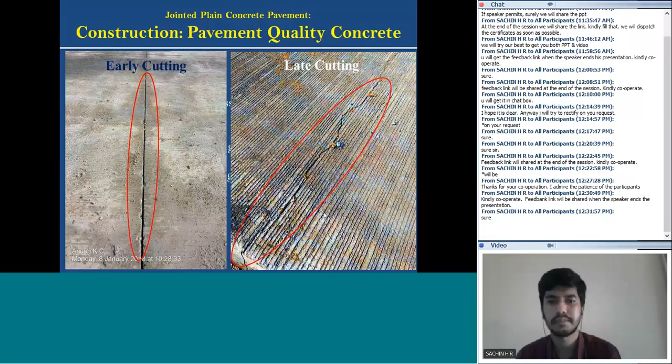Second thing, if you cut late - if it's too late - a crack may already have occurred at some other spot where you planned to do the groove cutting. This results in a full width, full depth transverse crack, where you don't have any load transfer across it. So it is very important to identify the typical groove cut window, and there are some guidelines as I told you.

Now next, once you identify the groove cutting time, the next thing is how to cut the groove - it's a very important factor. Normally you cut the groove to a depth of one-third the slab depth, or sometimes one-fourth, but one-third is more preferred. So if the slab is 300 mm thick, cut the groove up to 100 mm. Cutting depth is a very important factor - let's say if you cut to only 60 mm, even then it is not fine.

It still won't give a proper weakened plane for drying shrinkage to be satisfied. So it is always better to cut to a depth of 1/3 to be on the safer side, as it will also weaken the plane sufficiently. So if you go deeper, let's say why don't we cut D by 2?

If you cut D by 2, you'll cut the dowel bar also, right? There is a tie bar and dowel bar at this particular depth of D by 2. So if you go deeper cutting, you'll be cutting the dowel bar and tie bar also. To avoid this, 1/3 of the thickness of the slab is sufficient to create a weakened plane in the PQC

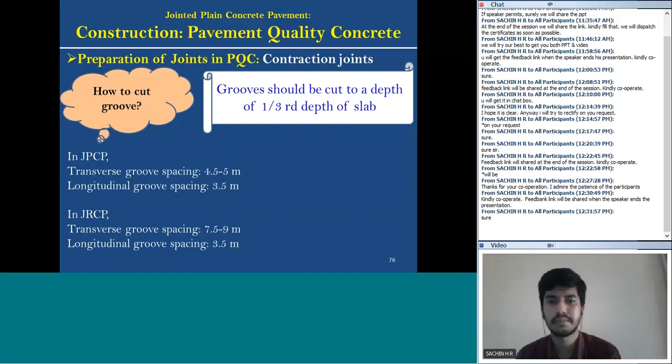So in JRCP we can go for a longer spacing so that we can have a better riding quality, but you may have to place a mesh or steel reinforcement.

Now one more important thing in groove cutting: let's say you cut the groove up to a depth of D by 3, and this is a dowel bar, right? A plastic sheet is placed around the dowel bar, and this is where you cut the groove. If this plastic sheet extends beyond the cutting depth, then it is safe, and the crack can generate just here.

But let's say you still put a plastic sheet, right, but it is not of a length that extends beyond the joint depth — then the crack won't occur there, because if the dowel bar is rusted or has surface irregularities, bonding can happen, and the crack can occur somewhere else depending on the stresses. So this plays a very important role in generating a crack below the groove cut position.

Anyway, you should do groove cutting at every 4.5 meters, but initially it may occur at every 9 meters. Then, as traffic starts repeating, when you open the road to traffic, this can occur at a closer interval. But the point is, it will weaken at every 4.5 meters as given by this kind of groove cutting.

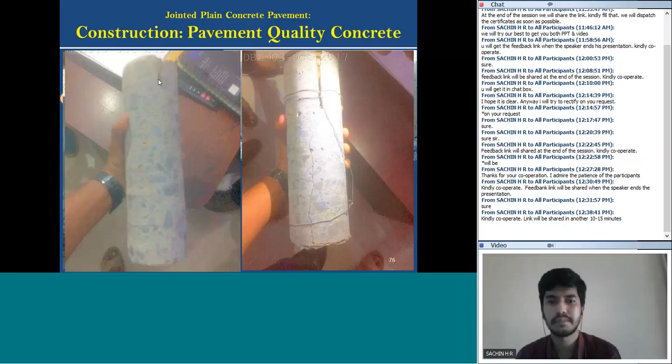Even if you cut a groove, it should be to a proper depth of D by 3. If it's not D by 3 — say it's D by 5 or some other depth — it won't weaken the concrete sufficiently, and the crack can occur in some other position where you may have to repair or replace the concrete.

And then, finally, at the end of the day, you should also tell the labor cutting the groove to check it regularly, so that if it is not cut to the required depth, he can cut it again to ensure the concrete is cut to the proper depth.

Because once these kinds of drying shrinkage cracks occur, it's very difficult to repair them, as they become uncontrolled cracks.

Our only option is to remove and replace the slab once again. And next part is, once you do all this cutting, everything is done now.

Next is curing. Once you cut, after 6 to 8 hours of laying, you start curing. The curing is also a very important aspect, and we need to adopt some sustainable practices.

Why? Because let's say we are paving the concrete pavement in a place in Maharashtra which is a very arid region, like Nagpur or Solapur. Those are very hot areas where water scarcity is too high. In those days, if we start using water from borewells, which is used for drinking, for curing concrete, it's a complete loss of water.

Whenever you pour water on a concrete pavement, the water won't stay there. It flows, because there is a camber. It just wets the concrete and flows out, then comes out along the shoulder, making stagnant water at the shoulder side. It is complete waste of water.

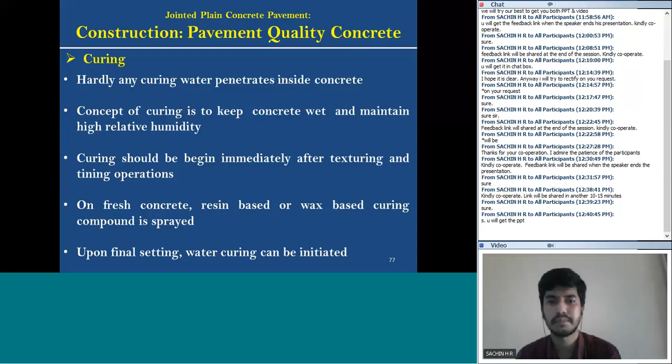So one should basically check if the practice is correct or not. There are many other methods where you can adopt some sustainable practices.

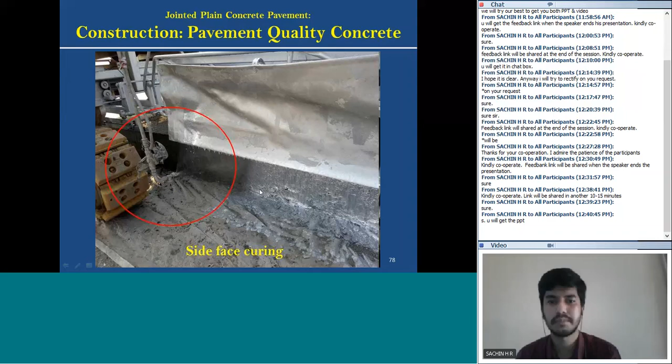One way is, in the initial stage, we go for resin-based curing. We apply it using this sprayer, a spraying curing machine, for side face curing. This is a debonding agent, and it will spray on the sides also to prevent any differential shrinkage. Then, after groove cutting, you cure it for 28 days, as you can see here.

So what we tried to do in some places was, we had a lot of resistance from the locals. This was while building a highway in Maharashtra. There was a complaint from people that we were using water unnecessarily. We also know that whatever water we use for curing concrete, it will just pour and flow on the sides and stand there as stagnant water. It's a complete loss of water.

So what we tried basically is to wet the gunny bag and then cover it with this debonding sheet. It has several benefits.

We also tried to test this kind of concrete cubes in our laboratory, building some small labs at the site. One was water curing, the other was this kind of plastic membrane curing. Then we used to see the compressive strength. Hardly we used to have a difference of 0.5 to 1 MPa, and both concretes used to clear the required strength of 40, the concrete grade. There was no much difference in the strength.

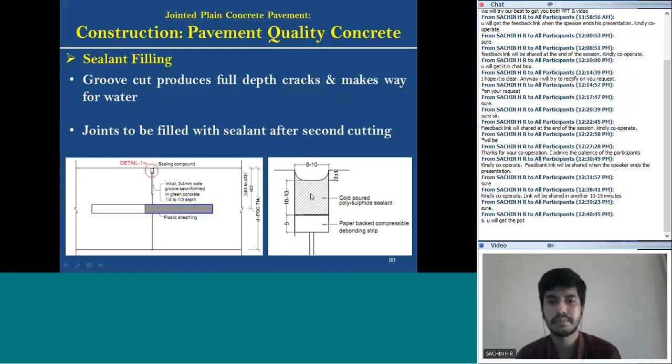Before filling the liquid sealant, you place a debonding strip, or usually we also use a backer rod. The debonding strip will prevent the sealant from flowing. Since sealant is in liquid form, it can easily flow if you don't give this debonding strip. So to prevent the flow of sealant into this particular slot, we put a debonding strip, then place sealant. This sealant remains in the joint and prevents any entry of water or other foreign materials, because the joint is a very important part of the concrete pavement.

Again, you will place the debonding strip or backer rod and then fill the sealant. Finally, once you do all this operation, before opening for traffic, you will fill the sealant, and then after 28 days of curing you can open for traffic, since all joints are sealed. At this point, the pavement construction is now completed.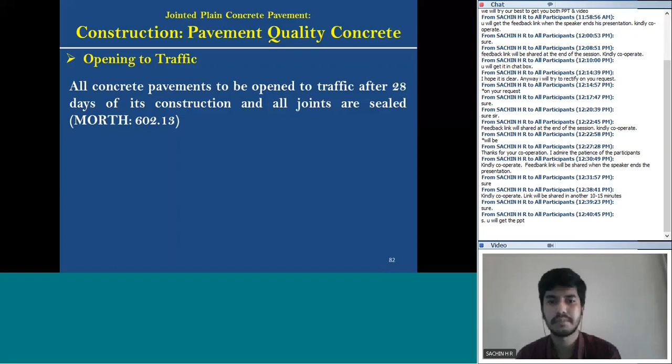Now let's say traffic is going. Sometimes when traffic starts flowing, and even before that, we see some premature distresses. Premature distresses can occur due to various factors. Now we will see what happens if one adopts wrong practices, or if there is some issue with the mix or the practice we adopted.

One is settlement cracks. Concrete pavements, if you see, most will undergo settlement cracks during that time due to various reasons. These kinds of cracks are most common in widening projects, where we go from 2-lane to 4-lane, or 4-lane to 6-lane, or existing 1-lane to 2-lane road. This is very common; settlement cracks are common.

So what happens if we talk about 1-lane to 2-lane? The existing lane or intermediate lane is 5.5 meter or 3.5 meter, and the existing is 3.5 meter. Whatever base materials you have, it can be WMM, subgrade or GSB, whatever layer you have. If it's a flexible pavement, you first remove the bituminous pavement, scarify it, and then remove this. So basically the lower layers you won't disturb, because in the contract it will be like you'll add additional layers to extend the need for additional layers.

So the existing base layer will be properly compacted and consolidated, but the new layer you put, the WMM, GSB, subgrade, may not be fully compacted or consolidated. Over time there will be differential settlement between the base of the new layer and the base of the existing layer. This movement cannot be taken by the concrete; it will just settle, and the crack will occur. This is a typical settlement crack, and it can be of any shape. If it is a longitudinal settlement, you can see a long crack running along the pavement. Most settlement cracks run along the direction of traffic.

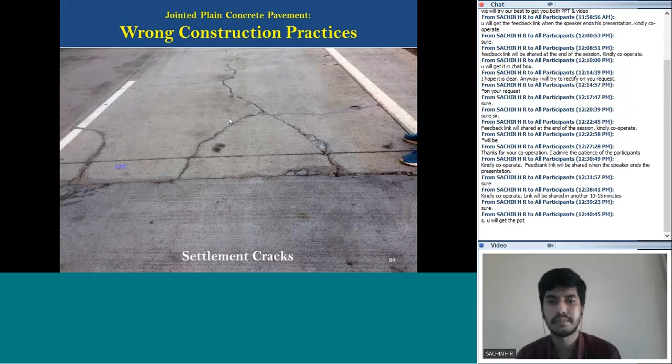These transverse cracks mostly occur because of groove cutting. Another distress is pop out. Pop out happens when you have very bad quality aggregate or the amount of clay particles is more in the aggregate, so the chunk will slowly start breaking out and form small pop outs. These small pop outs can further become big potholes over time when water enters.

Another thing happens with a two-way road, where one side is hardened concrete and the other is wet concrete. Since one is wet and one is hardened, it naturally forms a cold joint, which is automatically a filled-up cut. But still, people start cutting here thinking they need to cut the concrete, creating two cuts - one made by cutting and one formed naturally by the hardened cold concrete. In these conditions, there's no need to cut any groove sideways; the groove can be cut along the cold joint only. This way you can also carry out proper maintenance activities.

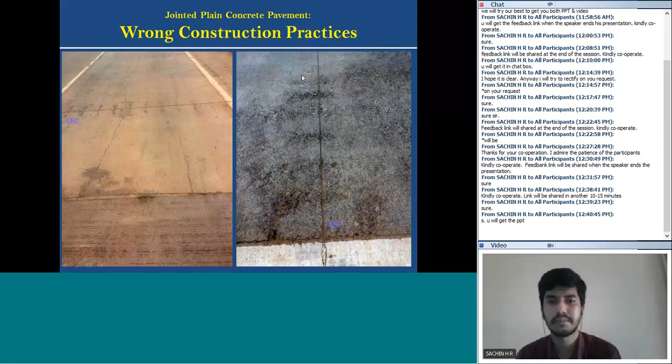Another thing is this profile issue - you can see the profile has some ups and downs if you observe the side profile. Why does this happen? As I told you, the slip-form paver moves sensor-based, with the sensor placed right on the string line. If there's an issue with the movement, such as foreign waste material on the DLC, when the paver moves over this material, the whole level will rise and the profile will change. So the DLC surface should be clean and free of any foreign material - no waste material should be dumped on the path where the paver will move.

If something goes wrong, finally we need to remove the whole slab, because in concrete pavements we have very minimal methods of repair, unlike flexible pavements where you can easily put a new layer - if something happens, you can mill it and put a new asphalt layer. But here in concrete pavement, it's very difficult to maintain once cracks have occurred. If those cracks are more than depth of d/2, called structural cracks, the only option is slab replacement - replacing the whole slab again.

But this kind of concrete slab replacement is a waste, not only from the contractor's point of view, but from the point of material waste as well - so many aggregates fired to produce this concrete, so much cement wasted, so much labor used. All these losses accumulate and may incur loss for the contractor too. So one should be very careful while laying concrete pavement to avoid any kind of distress that occurs in the fresh state. If distress doesn't occur in the fresh state, the pavement will serve for a longer duration without issues. This should be given very careful consideration while laying concrete pavement.

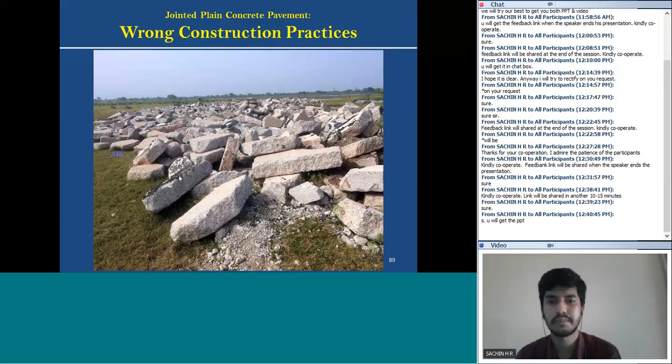And there's one more thing I observed in most roads - when we see concrete pavement in flyover sections, where we have a flyover or a VUP, vehicle underpass.

We give a rise profile. In those cases, we sometimes give a concrete pavement also. But what happens there? You're placing an RE wall, and RE wall has soil below it. There is soil, and on the soil you place DLC, then PQC slabs.

If you compare this, it's like placing butter. A thick butter is there, and on the butter plate you're placing a steel plate. When the butter slowly starts melting, the plate will slowly slide. You can apply the same analogy here also.

If soil is like butter, if some water comes or if there's moisture entrance, it will start slowly moving, and this movement has so much effect on the concrete slab. Joint widening is one of the most common things you can observe in the rising profile of concrete pavements. Wherever there is a rise RE wall section, you can see a widened joint. This is because wherever there is movement in the soil in the RE wall section, either transverse movement, it leads to joint widening.

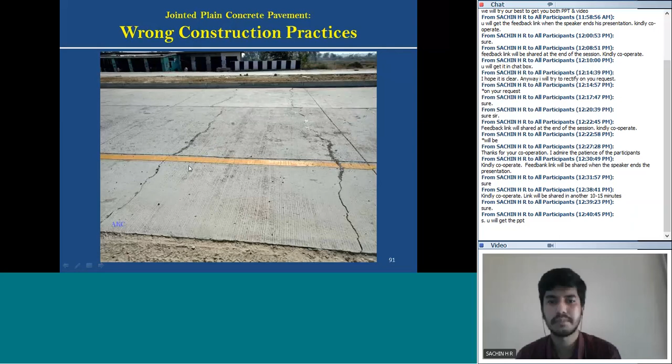The second thing again is in the same RE wall section - you see the joint movement. Normally the top cut is 10 mm, but here it is 50 mm movement. You can imagine the amount of force the concrete slab will put on the RE wall section. This is because the soil is moving, and there is some moisture entrance or other issues there.

Even rodents and rats can cause very serious damage to RE walls, because rats and rodents start digging the soil, causing very serious damage to the RE walls. But this is in addition to the entry of moisture. As the soil slowly moves, dissipates, or consolidates, this is seen in the concrete slab also as joint widening. It's a very serious issue because it may also apply extra force on the RE wall, which it is not designed for.

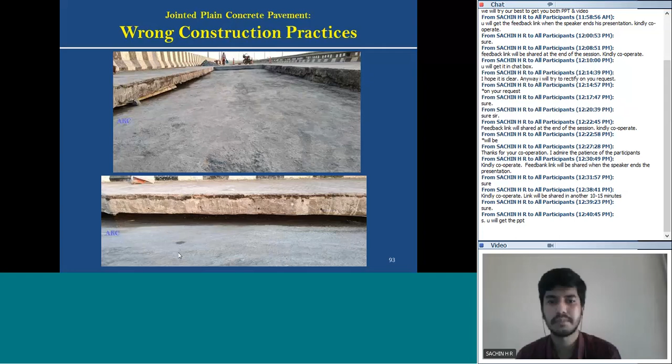This was about some discussions on what we found, and soon I'll finish this. Let's finish the repair methods. Now I told you PQC has very few repair methods, so one of the most followed is just remove and replace the slab.

This is the worst case, and if there is settlement, it's very difficult to repair. So if there is settlement between the existing and new lane, it's a very difficult task to repair basically.

Normally we classify the crack depending on the depth. It can be d by 2, less than d by 2, or more than d by 2. If it is less than d by 2, we call it a non-structural crack. If it is more than d by 2, it's normally called a structural crack.

If you see full depth, the longitudinal structural crack versus transverse structural crack - the transverse structural crack is more dangerous or more affecting than the longitudinal one. That's why for full depth repair, if the longitudinal crack is more than 12 mm, but if transverse is more than 6 mm, you go for full depth repair. So this is more dangerous or more damaging.

Normally we have two repair methods. One is when the crack depth is less than d by 2, that is thickness by 2 - we go for stapling or stitching. This is typical cross stitching. So in cross stitching, basically, let's say a crack is there and this crack depth is less than d by 2. If it's a 300 mm thick slab, let's say the crack is 100 mm in depth.

Then what we do is go for cross stitching - basically we make a small hole in a zigzag manner. This particular crack is here. Now we make this hole or slot in a zigzag or staggered manner, at least 150 mm from the joint or crack face. You see, from the crack face at least 150 mm we give a cut, like this slot. Then we fill it.

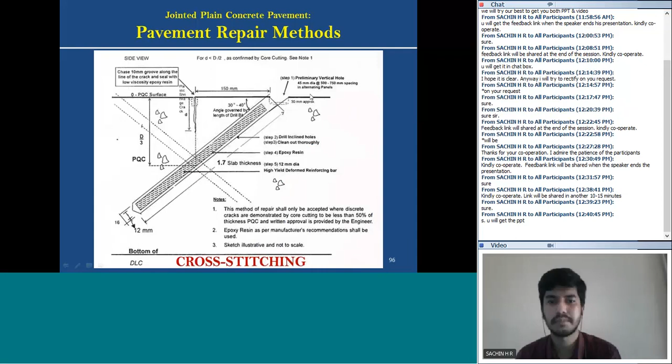Then we fill this place with a steel rod. It can be a 12 mm diameter TMT bar or a 16 mm diameter TMT bar, and then fill with epoxy to prevent entrance of water. Later these bars will be cut and made flush with the concrete surface.

Now what this will do is basically hold the slab - it reinforces the crack and also prevents any movement of the slab towards this side, because it is now being reinforced. This is one method called cross stitching, which is less damaging.

This other method is called stapling. Now stapling is quite more damaging than cross stitching, because you will have to make a big slot or groove, then place the TMT bar and fill the epoxy. This is how stapling is done - this is basically the groove that has been cut to place this bent steel rod.

It's like when you staple paper - you bring it here in a staple shape. You can see this particular shape of the rod, like a staple pin that we use. So basically it makes this groove, which can be 1 meter long or even shorter, depending on your requirement. Then you make grooves at some intervals, place this rod inside, and then fill the epoxy.

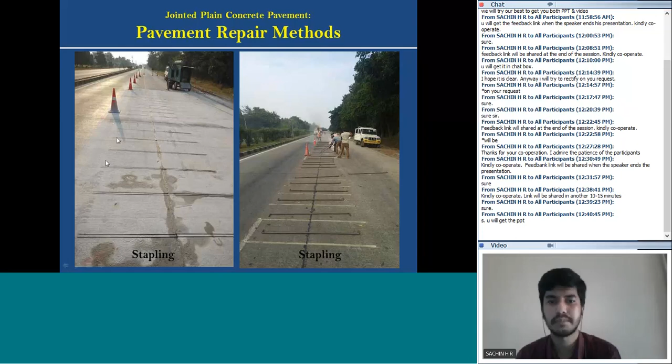This is quite damaging because sometimes, if you don't adopt proper practices, this particular small portion can act like a small beam, and a crack can occur here. At this spot you can see cracks if something goes wrong while making this repair. The typical groove that is made gets pushed inside, and then you fill the epoxy.

So why is this being done? You can see there is widening happening in this longitudinal joint, to keep them from separating further in the future. One thing to keep in mind is that the longitudinal joint has a tendency to open, that's why we normally give tie bars.

But in sections with curves where you have super elevation, one of the best methods is to reduce the tie bar spacing. In a normal straight section, we go for a spacing of around 600mm or 650mm. But wherever we have curves with super elevation of 5% or 7% maximum, there is an inner slab and outer slab with too much super elevation, so the inner slab has a very high tendency to move away. If we adopt a spacing of 650mm, this won't work out.

In those cases, you can reduce the spacing to half. If it is 650mm, go for 300mm at the location where you have a curve, so that you have more tie bars and more reinforcement, and it will hold the slab very tight without further movement. This is typical of how slabs move away from each other at the longitudinal joint.

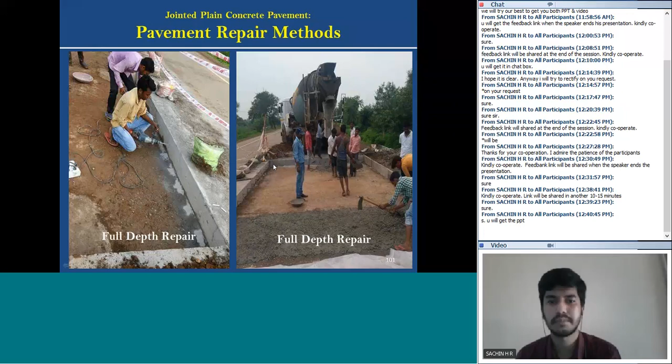Once you place the full depth slab, you start drilling to place tie bars, and also make drilling here to place dowel bars. Whatever old dowel bars are there, you remove them, and you make proper slots to place new dowel bars on these two faces, and here you place a tie bar by making some grooves. Finally, next we have partial depth repair.

Normally corner cracks are what we see most, where we use partial depth repair. We can cut up to some portion, normally 1.5 meter by 1.5 meter, and remove the whole material to the depth of the crack, and replace it. But one thing: whenever you cut full depth here, always give a dowel bar for proper load transfer from one face to the other.

So this is my end slide.

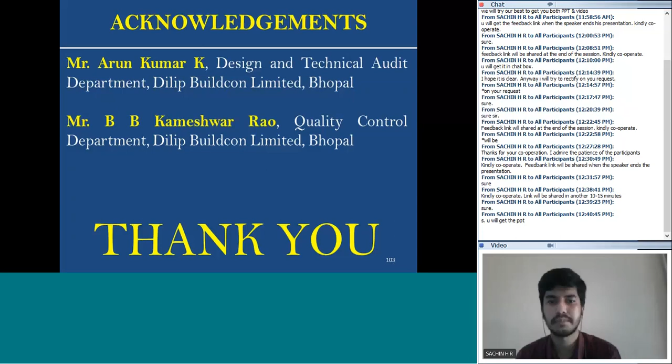I acknowledge Mr. Arun Kumar and Mr. B.B. Kameshwar Rao, who are my seniors at Dilip Buildcon Limited, who helped me a lot in gaining this kind of knowledge. We used to share our knowledge and experience about roads and pavements in normal office discussions. Thank you all.

Next we have a question from Pandey. Sir, explain how expansion of lane is done on expressways. Lanes - yeah see, normally what happens, let's say if an existing 2-lane road is there, and now you will go for a 4-lane road.

So the existing surface is bituminous. Normally you remove the bituminous surface, then if the contract says you retain the existing layers and add new layers, they will normally give some benching between the new layer and existing layer - it means creating like a bench, so that there is a connection between the new layer and existing layer. This bench acts as a medium to prevent settlement between the new and existing layer.

This benching can be seen in the cross sections of the drawing. These are typical cross sections of widening sections, whether 2-lane to 4-lane widening or 4-lane to 6-lane widening. At the existing sections, they may show some benching, given to prevent settlement of the new layers in future.

Okay, we have more question from M. Bharani Krishnamurthy. What is the method of crack filling if the cracks are finer in width but having a depth of 50 mm?